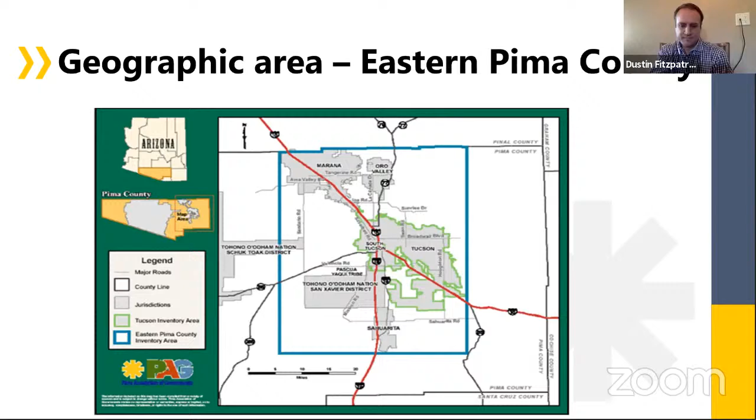So there are three sources used for emission calculations in the inventory. PAG subscribes to a membership with ICLEI, which is formerly the International Council for Local Environmental Initiatives. They now refer to themselves as ICLEI, Local Governments for Sustainability, which grants access to the ClearPath online greenhouse gas emissions calculator. ClearPath is the leading online software platform for completing greenhouse gas inventories, forecasts, climate action plans, and monitoring at the community-wide or government operation scales.

The ClearPath tool has been used to calculate emissions for previous inventories and calculates emissions from energy, waste, water and wastewater, and aircraft and locomotives.

The EPA Motor Vehicle Emissions Simulator, or MOVES, is an emission modeling system used for mobile sources. PAG uses MOVES to calculate emissions for transportation conformity and emission reductions for our travel reduction program, generally in terms of criteria pollutants. But the model is also used to calculate greenhouse gas emissions from mobile sources. Emissions can be modeled for various vehicle source types, such as passenger and commercial buses and single unit and combination trucks, and emission factors can also be separated by fuel types.

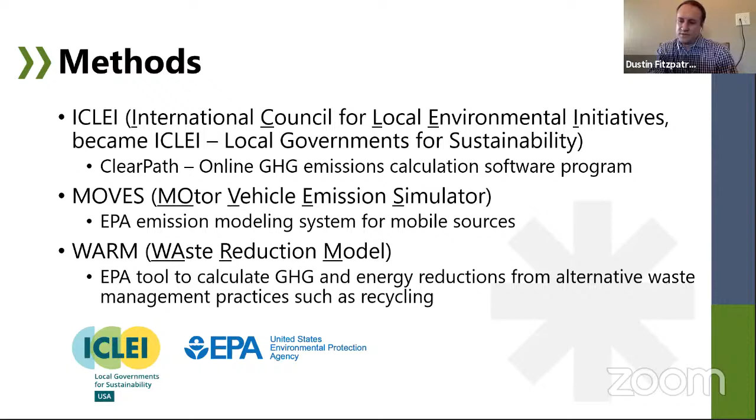So here I'll go over the emission sources. They're categorized in the report as stationary energy use, transportation, waste, industrial processes, and other.

Stationary energy is separated into residential, commercial, and industrial sectors. The residential sector greenhouse gas emissions are based on household energy use, such as for heating, cooling, and lighting. The commercial sector includes energy used in non-residential buildings, such as schools, hospitals, retail, institutional, and government-owned facilities. And the industrial sector includes energy used in mining, agriculture, and manufacturing operations.

Transportation includes on-road emissions from private and commercial vehicle travel and public transit. Non-road emissions are from agricultural, commercial, industrial, and construction vehicles, lawn and garden equipment, and airport and railroad support vehicles. And then there are locomotives and aircraft for transportation.

The waste category includes solid waste disposal and wastewater reclamation. Recycling is noted here in the report as an informational item in terms of emission savings. The industrial processes include cement production, and the other category includes emissions from water delivery through the Central Arizona Project canal network. So the three target greenhouse gases accounted for are carbon dioxide, methane, and nitrous oxide.

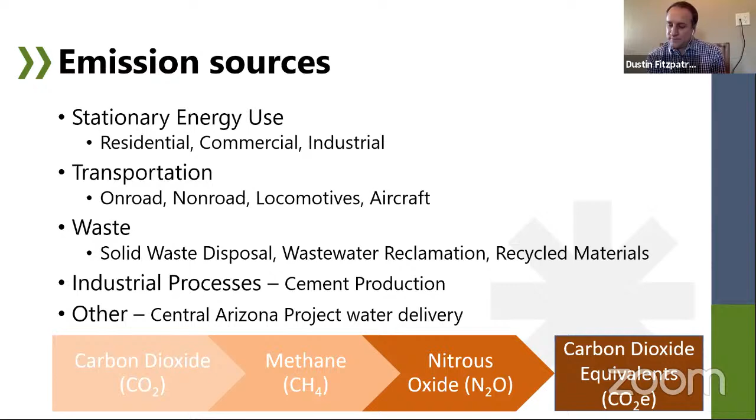Per the fifth assessment of the Intergovernmental Panel on Climate Change, methane has 28 times the global warming potential of CO2, and nitrous oxide has 265 times the global warming potential of CO2. So the CO2 equivalents are derived from the addition of CO2 plus any relevant methane and nitrous oxide, multiplied by their global warming potential factors.

So these are the inputs for the City of Tucson community subset and the regional inventory and the relevant contributions from the different emission categories from our previous report.

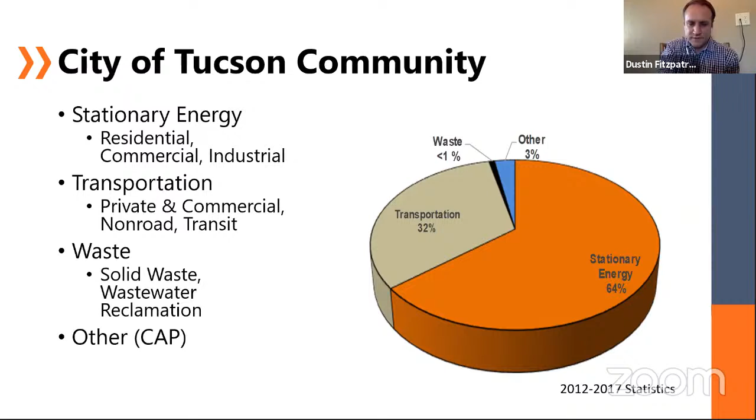So these are the next steps for the inventory that's currently underway. This month, our modeling section will complete the MOVES modeling of the transportation emissions for the region and for government inventories. The discrepancies with the previous inventory will be resolved, such as inputs for greenhouse gas emission factors and unit conversions, like US to metric tons, making sure everything lines up with the previous report.

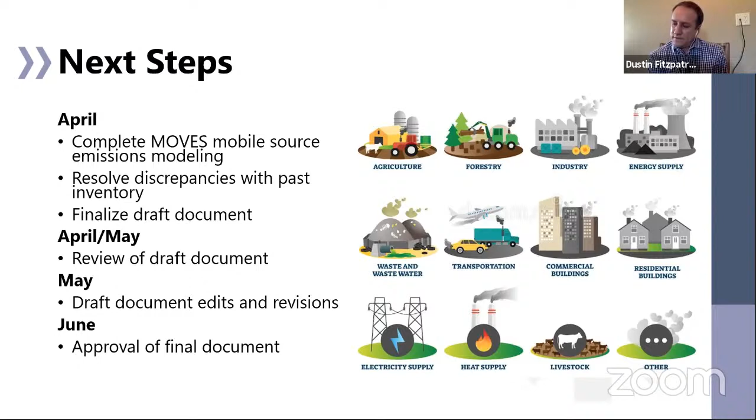I'll be happy to take any questions. Once the inventory is completed in June, I'll be happy to do a presentation providing the findings from that inventory.

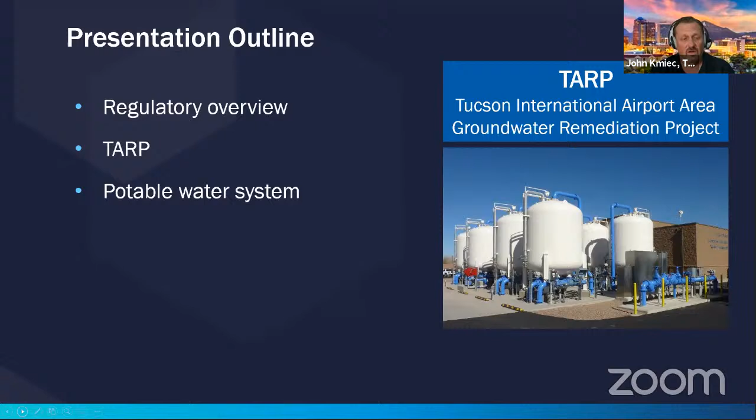Regulatory overview: for those of you, hopefully most people on this committee since you're involved in environmental programs, understand that PFAS is a national concern—actually a global concern—that has accelerated a lot, particularly over the last 5 years, with the advent of better analytical methods and procedures to detect these compounds at lower and lower detection limits, in the part per trillion range.

Just really quick, perfluorinated and polyfluorinated alkyl substances are substances that were developed and went into production pretty much after World War II—anything that was a good stain repellent, anything that was a good water repellent.

So you think about your 3M Scotchgard, you think about Teflon, you think about Gore-Tex compounds, things like that. For most people it worked really well over the last 50 years, and we used them in our personal lives and in our workplace to protect carpeting, furniture, all things like that.

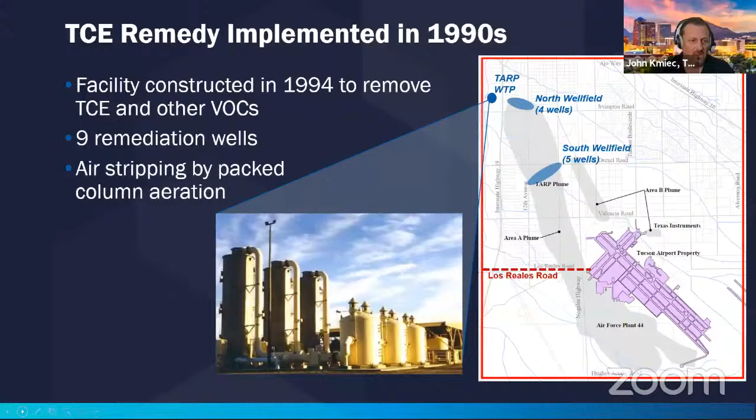Let's fast forward a little bit. Now, in 2002, EPA contacted several Superfund sites across the country, like the Tucson Airport Remediation Project, and told us they were starting to notice a co-contaminant with those types of activities or environmental releases, called 1,4-dioxane. They asked the city of Tucson to look into it. Of course, we found it - we were common as well with other Superfund sites across the state and across the country.

So we started looking at how to remove 1,4-dioxane, because the air stripping process used for TCE is not effective for 1,4-dioxane. It's a much more stable chemical that does not like to volatilize with the air stripping treatment process, so it had to be removed a different way if we wanted to remove it.

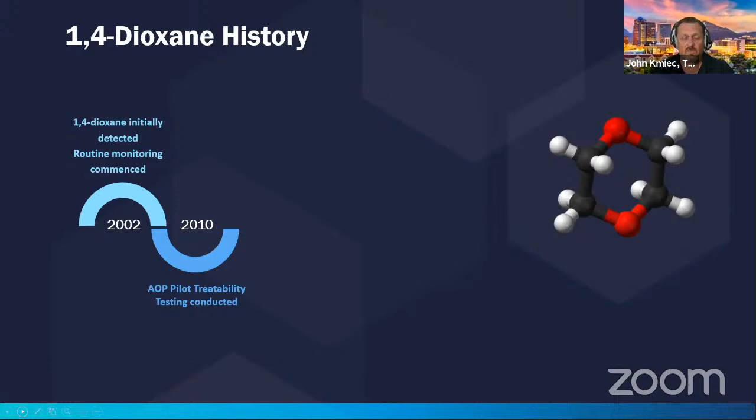1,4-dioxane, much like PFAS is today, is an unregulated contaminant. EPA has guidance, but they have not regulated it as of yet as a drinking water standard. So we started looking at new processes - one of those is an advanced oxidation process.

Fast forward a few years after that, in 2011, EPA changed the health advisory. It was 3.5 parts per billion. They lowered it by moving the decimal place one point, to 0.35. All of a sudden, this became an issue for how we were operating the TARP remedy and providing treated water to Tucson Water customers, because we were now going to be struggling to maintain those levels.

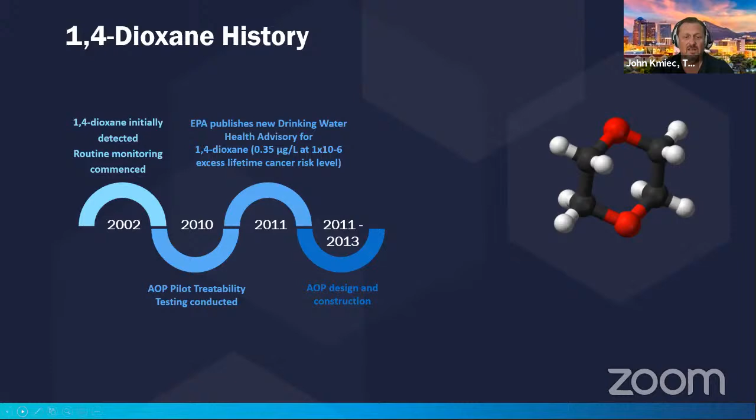So the city decided we need to continue to treat this and continue our obligations under Superfund to continue the TCE treatment process. So they started developing and designing a TCE and 1,4-dioxane treatment process in the early 2010s to remove both.

And again, it was that advanced oxidation. So by 2014, down at the TARP facility, the air stripping process was not effective for 1,4-dioxane. Now there was an effective treatment process just constructed called the advanced oxidation process.

The advanced oxidation essentially adds hydrogen peroxide to the water recovered from the well fields, then hits it with strong ultraviolet light, creating hydroxyl radicals which break apart organic compounds like TCE and 1,4-dioxane into smaller, harmless components. That water is then safe for consumption. It's a very strong and very clean way to treat water.

One issue with advanced oxidation using hydrogen peroxide is you end up with hydroxyl radicals that may not be fully consumed by the organic contaminants in the water. So you need a final stage process, which is quenching the water. The treatment chosen for quenching the water before it can be released to the distribution system was granular activated carbon.

Very effective in doing that. A lot of organic carbon, doing that in large quantity, having the water pass through it, the water is quenched, the activity is taken out, and the water is ready for final potable distribution.

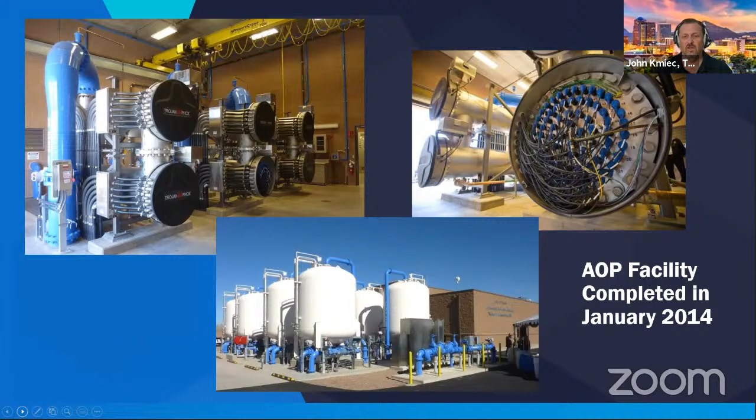And that's a very important thing as we head down this PFAS path, and why I'm explaining it here.

John, you're at a little over 13 minutes, almost 14 minutes. Okay, how many more minutes do I got? About 2. Oh, all right, then this will be quick.

Okay, here's a schematic of the treatment process. Hopefully many of you have seen it, kind of what I just described.

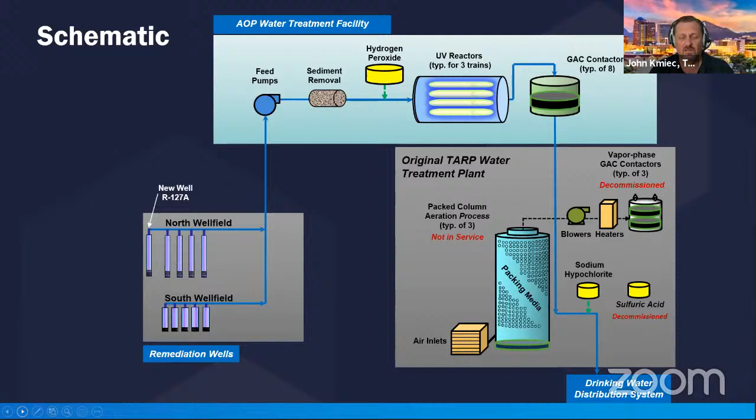Now the PFAS history: 2009, like I mentioned, we started seeing it. We detected some PFAS detections at TARP by 2013. Again, no real guidance from EPA, but all of a sudden they changed the health guidance from 400 to 200 to 70 parts per trillion. This became more of an issue for Tucson Water because now we're starting to get into areas where we found PFAS in our aquifer very close to that advisory level.

We made the determination at the time to start mitigating and ensure we're mitigating at TARP below our operational targets, but also looking throughout our potable source water system to make sure other areas were not producing this water and sending it into the system. Thankfully, we use granular activated carbon at TARP, which gave us a treatment mechanism we were unknowingly using for PFAS compounds because we chose that quenching method. So that was a good thing.

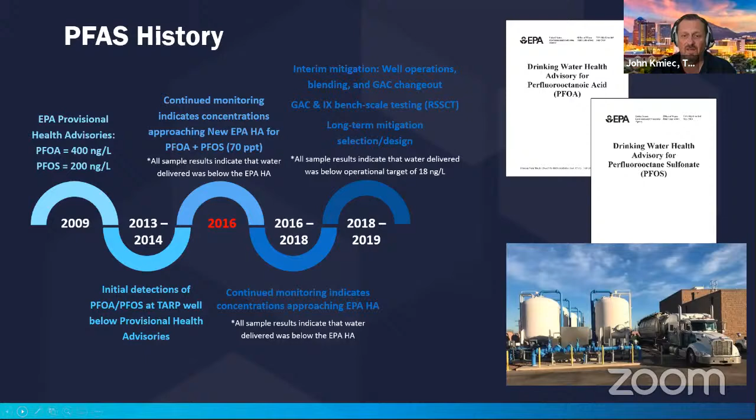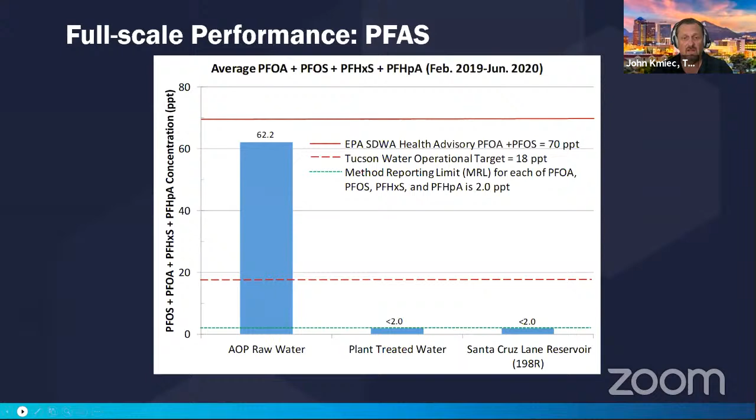But what that means is now we have to change the carbon more frequently. Instead of peroxide quenching, which would have lasted years, carbon is now changed about every 5 to 7 months. We've done multiple changes now that we're monitoring for PFAS. The good news is our treated water ending up in the community is well below our operational targets, and almost all the time below even detection limits, going into our potable system.

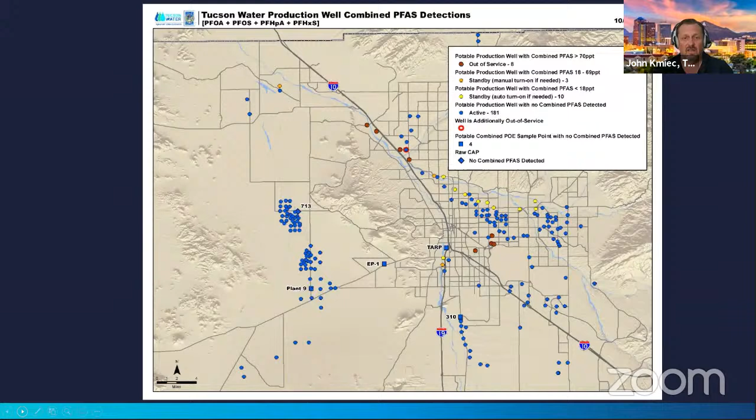So here's an overview of the Tucson Water wellfield map. Besides what's been found near the airport properties, we've also had large detections of perfluorinated compounds coming from the northwest corner of the Davis-Monthan facility, as well as along the Santa Cruz and in the northwest side of Tucson's aquifer going into the town of Marana.

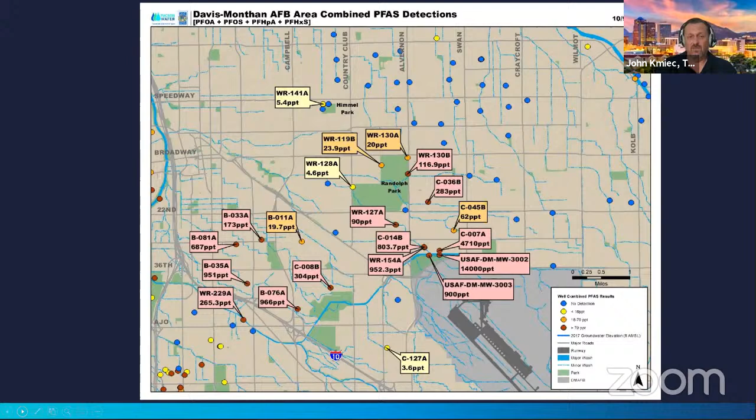We've engaged with ADEQ quickly in this process and asked the state to help identify what's leaving the base and come up with a plan. ADEQ has had dedicated funding from the WIFA program for the Central Tucson PFAS study. They've been working in that area north of the base and identified a concentrated plume heading towards the Tucson Water Central wellfield, which we were concerned about. So ADEQ is now developing a treatment plan to stop this plume from migrating any further into the Tucson Water Central wellfield.

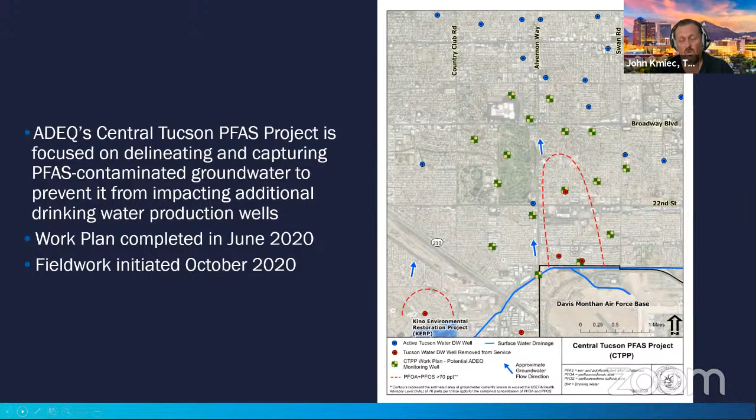Our wells in this area have been shut down as our mitigation process right now is avoidance. So that's our primary mitigation strategy, is to turn wells off and to go to different areas of source water. And that wraps up the quick part on the potable side.

There are 3 primary areas where PFAS is located, and this will segue into Stephen's conversation. The 2 I focused on were TARP, and then quickly the Davis-Monthan area, where we're supporting ADEQ taking the lead. The last area is along the Santa Cruz River on the northwest side of Tucson, entering the town of Marana.

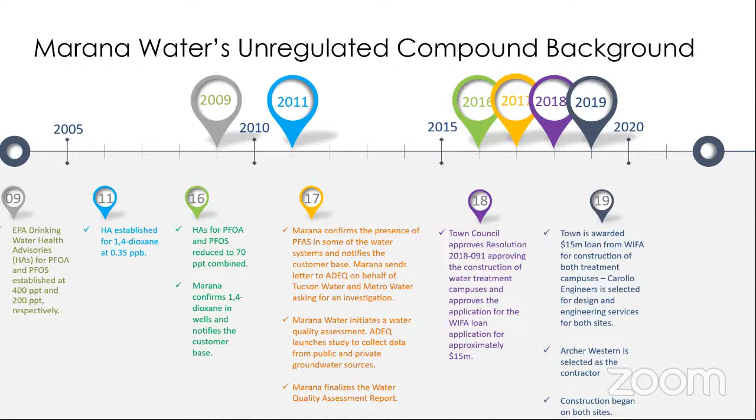Today, we have recently received approval of construction for both facilities by ADEQ.

The 2 water systems affected are the Picture Rocks Water Treatment Campus area, Continental Reserve 1 and Continental Reserve 2, west of I-10, north of Ina Road off Silverbell. Also, our Airline Lambert Water Treatment Campus facility and zones, west of I-10, south of Avra Valley Road, close to the new Saguaro Bloom subdivision.

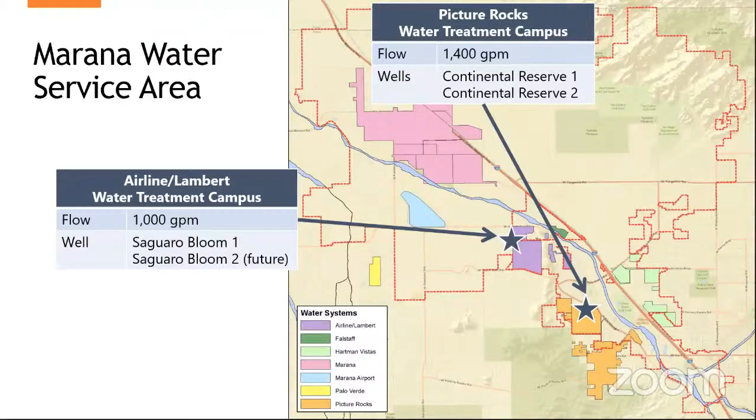During the design process and evaluation with Carollo Engineering, we looked at several different treatment methodologies. Keep in mind we had to treat for both 1,4-dioxane and PFAS collectively. GAC was common to both treatment processes, so it penciled out to use GAC along with UV peroxide for 1,4-dioxane, and GAC also reduces or removes the PFAS as well.

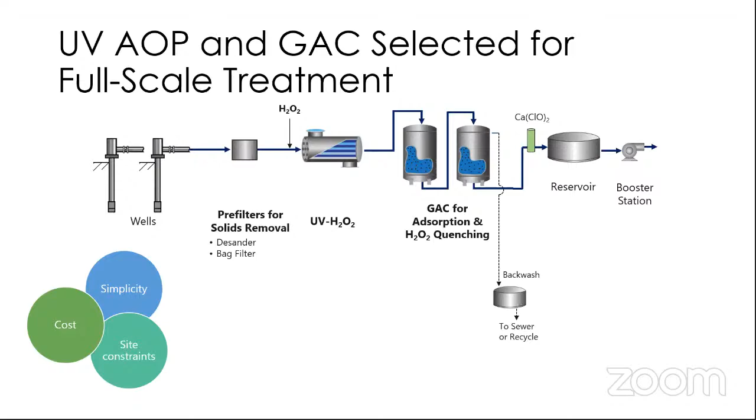Here's our Airline Lambert site layout. Basically, both treatment facilities ended up with the exact same treatment processes.

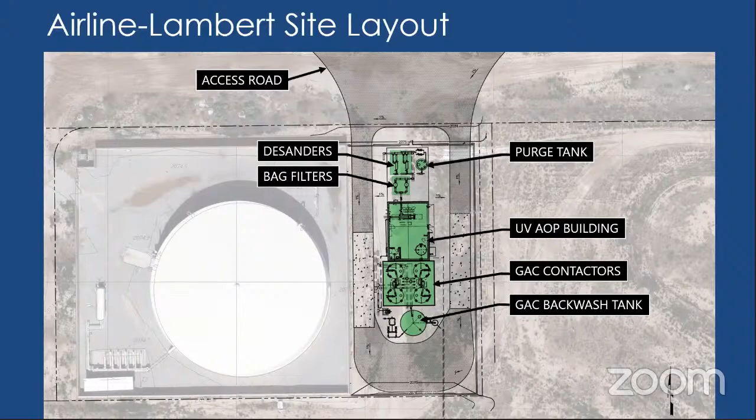Design criteria for both sites are actually the treated water quality operational targets, exactly the same in nature. For 1,4-dioxane, our target is to treat it to less than 0.1 parts per billion. For PFAS combined, the health advisory is 70 parts per trillion, and we wanted to bring that down. It's similar in nature to Tucson Water's approach. They call out 18; we actually call out 17.5 for that purpose.

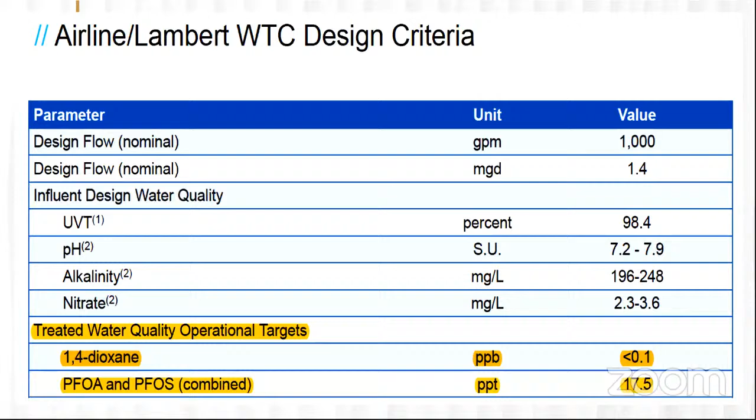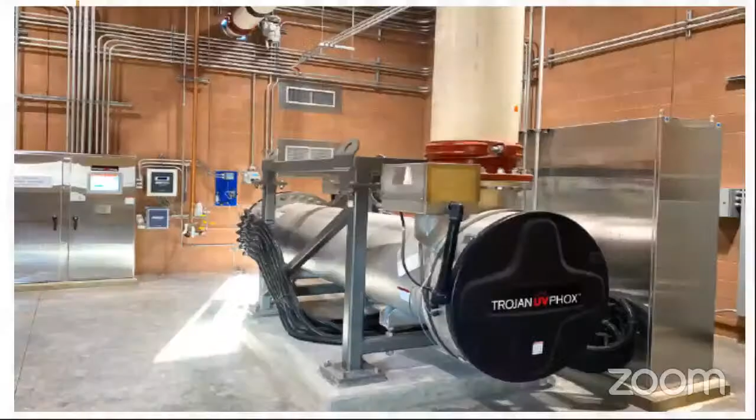Substantial completion for both facilities was achieved on March 12th. The airline Lambert, or the Saguaro Bloom system, is actually treating water 24/7 as we speak. Our Picture Rocks facility, which is by Continental Reserve, we are still in process testing and getting some of the bugs out of that system with the SCADA control and fail-safe parameters we're putting in place.

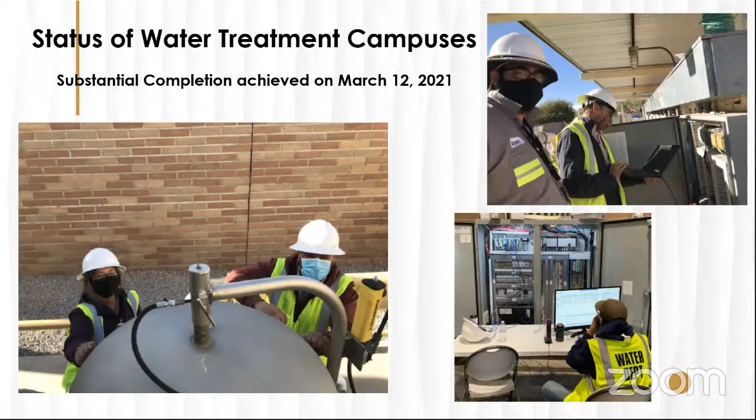Any questions? I got a question from the baby. Baby, everything is fine.

I do have a thought to share. I wanted to thank you both for the really informative presentations—obviously it's exciting my baby very much. But I really appreciate how open you are with all this information, and congrats on all the proactive treatment you're doing. I'm wondering, perhaps through your interactions with SAWA or otherwise, are you working with or hearing from very small providers or private wells on recommendations they can do to monitor or treat if necessary?

I guess I'll try to answer that one. Most of the private wells where this type of detection has taken place—I believe individuals associated with PDEQ have reached out to any private well owners in those areas. I think Marie Light is on. I don't know, Marie, if you want to address that.

Yes, I can provide some good information for that. Thank you, John, and thank you, Stephen and Dean as well. I appreciate both of your companies' proactive actions to keep people safe. I know, John, that the data you provided, Pima County Department of Environmental Quality identified a potential danger for private wells in the area just north of the airport. So we took all that private well information and did a scan of potential private well owners.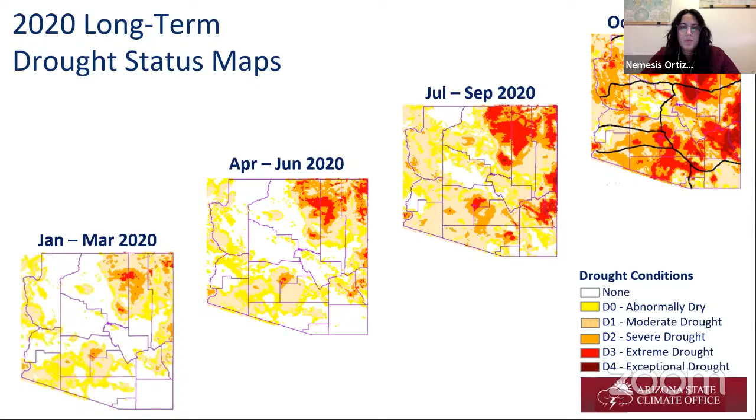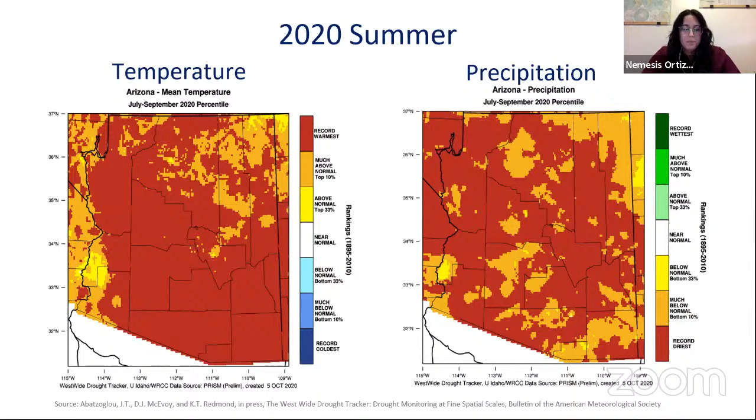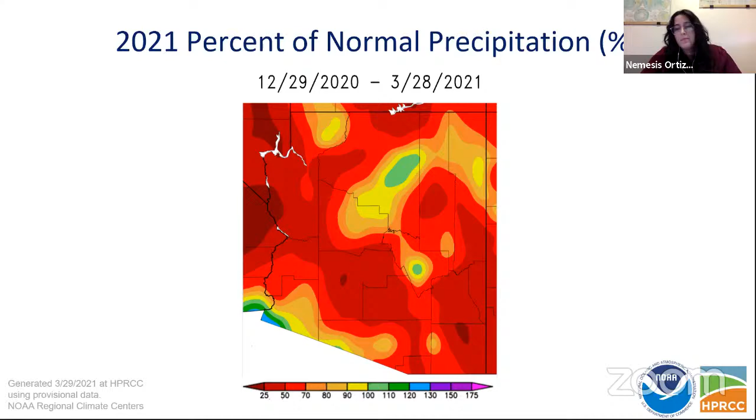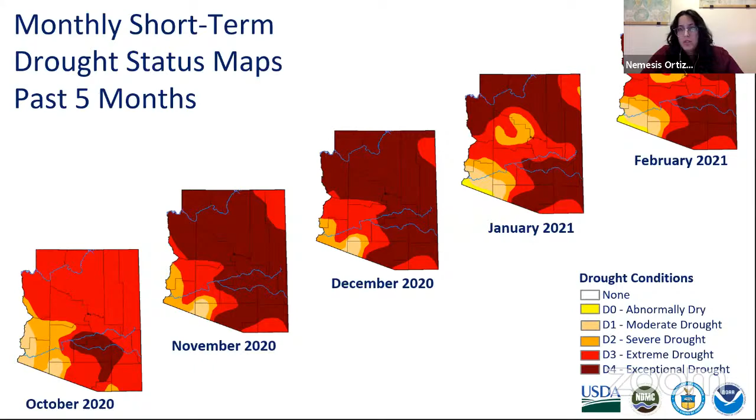During February, precipitation across most of the state was 25% of average, while the White Mountains received near average precipitation.

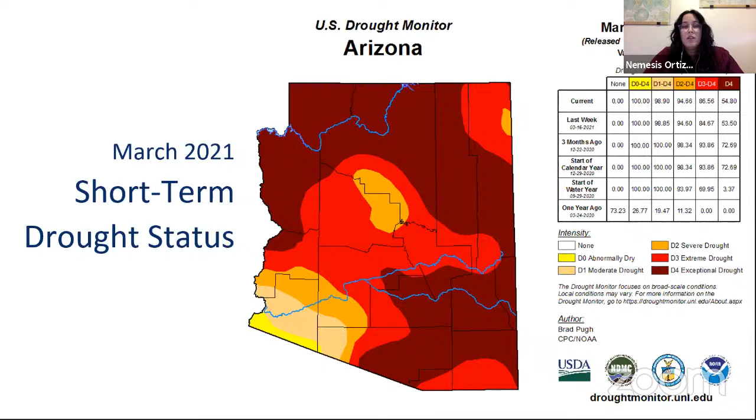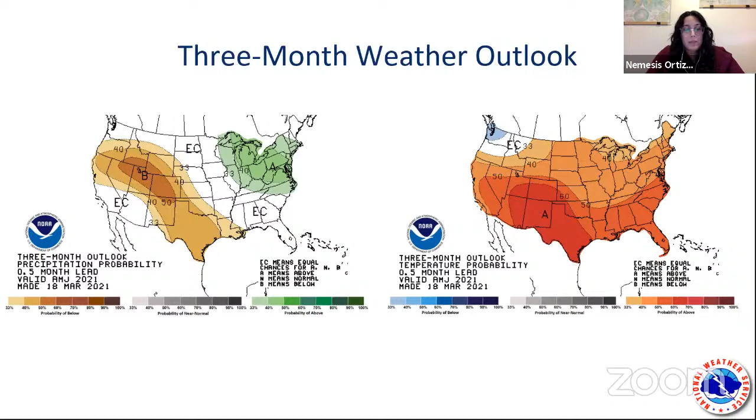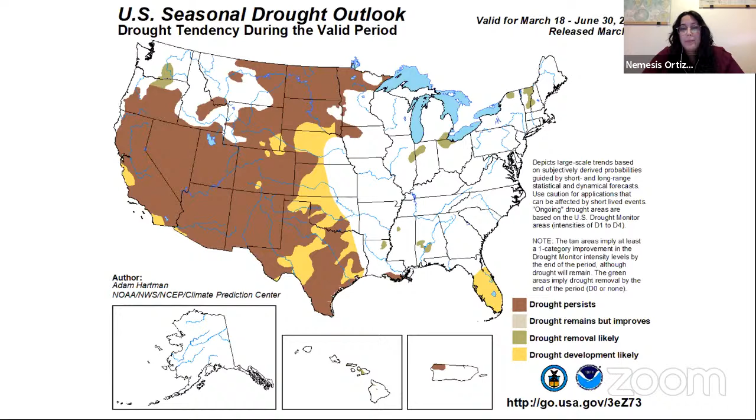Based on the presentations and discussions, the ICG agreed to recommend to the governor to maintain the drought declarations currently in place. For anyone interested in learning more about the meeting and any materials for it, you can find them on the ADWR website.

The next ICG meeting will be held on May 11th and will be open to the public. Anyone interested in more information can definitely contact me.

Lastly, ADWR is required to submit an annual drought report to the governor's office by the end of the fiscal year for the previous water year. Water years run from October 1st to September 30th.

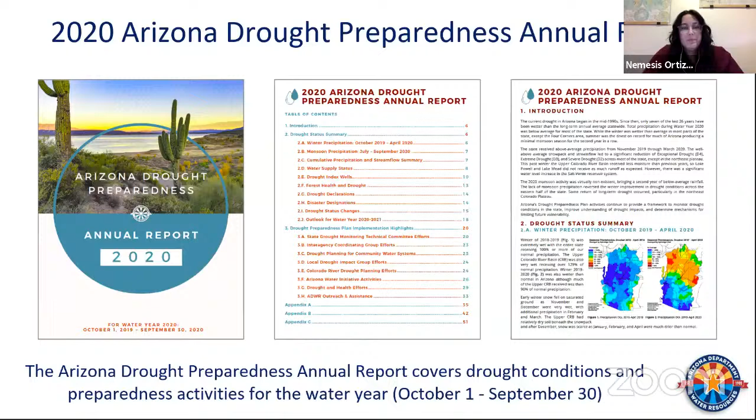Here is a short summary. The 2020 monsoon season was the hottest and driest on record for most of Arizona, leading to a significant increase in short and long-term droughts. While some parts of the state did receive precipitation, 55% of the state is currently in exceptional drought.

The 3-month weather outlook shows a 50 to 60% probability of above average temperatures, and drought is expected to continue according to the US drought outlook. The Drought Interagency Coordinating Group has recommended keeping drought declarations in place since 2007, and the next meeting will be held on May 11th, 2021.

The 2020 Arizona Drought Preparedness Annual Report is available online for anyone interested in learning more about the activities and actions that happened last year.

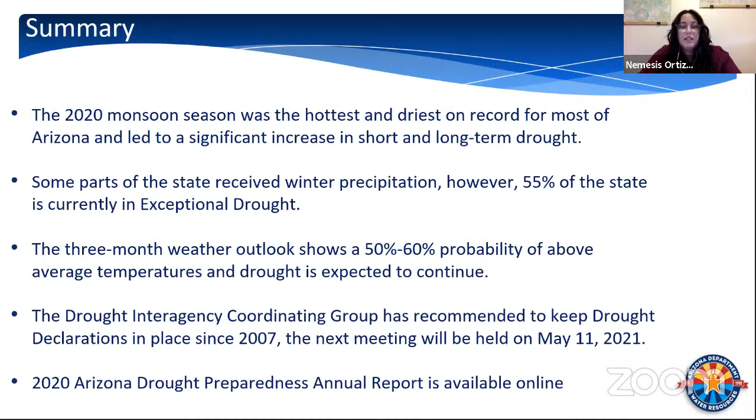Thank you. Does anyone have any questions?

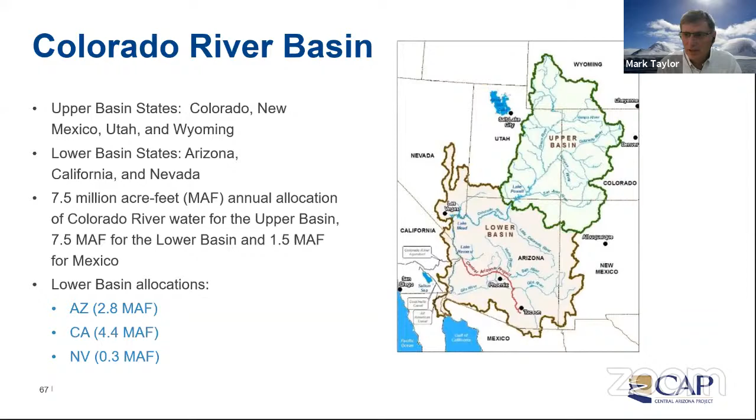And unfortunately, when we were looking for funding through Congress to build the Central Arizona Project, which is about a $4 billion project, we had to go through Congress. Took a lot of maneuvering to get approval through Congress, especially California. And the maneuvering ended up meaning that for us to get approval for those funds and build the CAP, we had to take the lowest priority on the river. So essentially that means if there's a shortage on the river, Arizona will be the first to take the major loss of that shortage. So that's something to keep in mind as we go forward on this discussion.

We're now at very critical levels, which we're going to go through the shortage levels that we're at. We are in a tier 0 shortage. It's kind of a new shortage that just occurred because of DCP, which we'll talk about. But the first major shortage is below 1075, and that's called tier 1. And there's a very high potential for that next year in 2022 because of water levels continuing to go down. And that's unfortunately when the real shortages are going to occur.

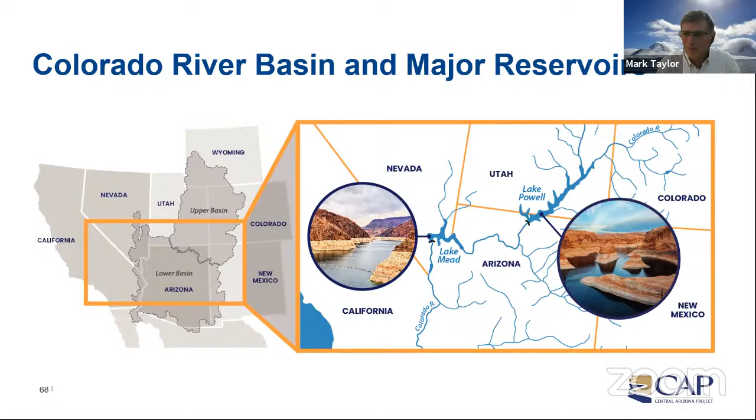I'm showing both reservoirs here because they are tied together in what's called the 2007 agreement, in when shortages occur and who loses that water during a shortage. And there's a huge interrelationship between the levels of these two major reservoirs that the Bureau uses in determining what kind of releases there are. But it's a little complicated to get into right now, so I'm not going to get into that.

They're actually quite low for this time of year. You'd expect after the snow melt and everything in the upper basins to be fuller. Not a good year again, even though the snowpack is not that bad, about 85%, because we've had a very dry summer and very dry fall, which we've had for the last couple of years.

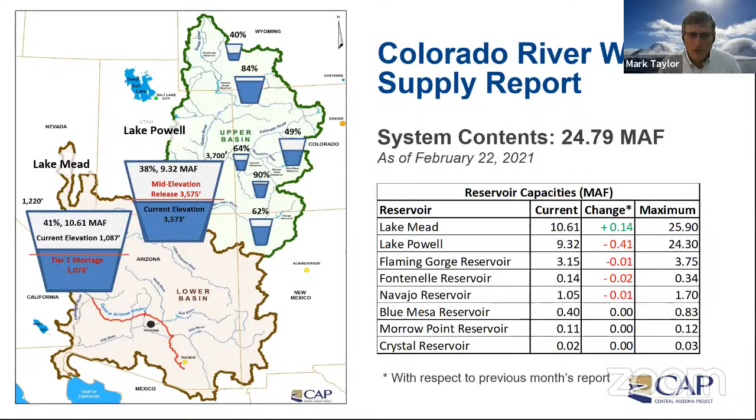The 2007 guidelines are really important, as we said. They're 20-year guidelines, they expire in 2025 or 2026. When they were originally adopted, I don't think the significance of climate change was really known at that time, and it really set who loses water at what elevations.

It was pretty obvious that we were going to hit 1075, and we could go quite a bit lower, maybe even down to 1050, when we start getting into real extreme issues with potential loss of power on both Hoover Dam and Lake Powell. It's going to be a critical elevation.

So actions needed to be taken before the expiration of the 2007 guidelines. We had to come up with a more equitable way, other than Arizona taking all losses, and wanted to come up with taking losses earlier than was shown in the 2007 agreements. Hence what's called the Drought Contingency Plan was developed, both for the upper basin and lower basin states, essentially to take shortages earlier and in greater amount than would have been taken before under the 2007 guidelines.

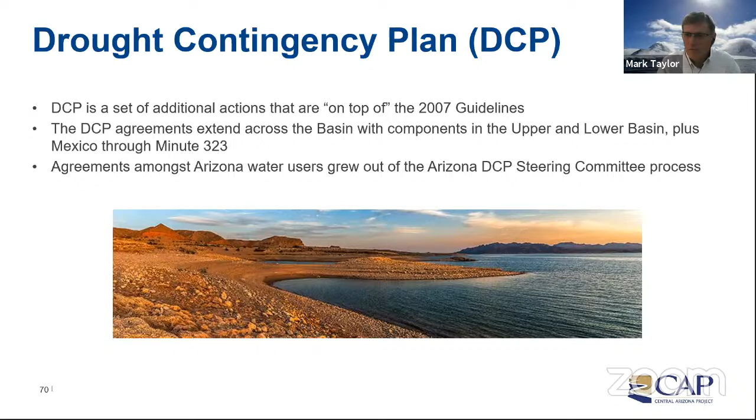Because of everybody's participation in this, we probably will level out before we get to 1050. I think there's no doubt we're going to be in the tier 1 shortages below 1075 on and off for quite a few years, but it may not go to very extreme depths of 1050 or lower. So that's the idea behind the Drought Contingency Plan.

The Drought Contingency Plan, just like the 2007 agreements, all expire at the end of 2025, so we are going to have to go through it again. It was kind of an intermediate agreement to keep us going until 2025, but I think it helps us a lot because it really sets a lot of the deal points we already went through in the DCP process, and I think it's also going to help us through the renegotiation of the 2007 agreement. So what happens because of the DCP?

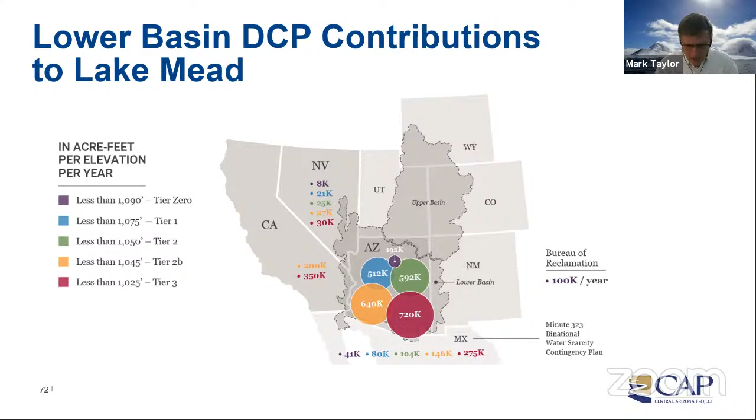So to finish this off, I want to mention we are going into what's called a reconsultation process. It's essentially a 4-year, 5-year process to renegotiate these 2007 agreements. We need to finish essentially by December 31st, 2025. There's about, again, we're taking that same group that we used in the DCP process, about 40 stakeholders. These stakeholders are part of the tribes, part of municipalities, ag districts, business leaders, legislators, environmental groups.

Everybody's part of this, and we've already started that process in what's called the ARC committee. That's going to be a long process, but it's a full NEPA process. It goes through Congress, and I'm sure it'll be going through state legislature also. So keep your eyes open for what we're going to be doing in that reconsultation process, because it's going to be very important to Arizona on what may happen and how these priorities can be set in the future.

So I think with that, I must be out of time. It goes so fast. Okay, yeah, it does go quickly. Yes, it does. So I think it may leave a few minutes for questions. I don't know. Yep, you were at 16 minutes, so we're okay. Gosh, it seemed like it. If there are any questions, please let us know by raising your hand, and then you can unmute yourself. I'm not seeing any raised hands at the moment.